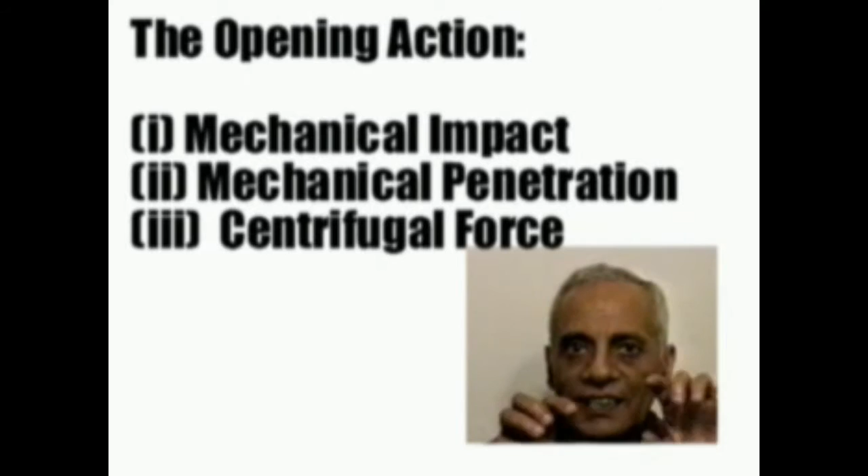The opening action in today's technology is accomplished using different mechanisms. First, mechanical impact: that is the mechanical impact through acceleration and deceleration of the fiber tufts against pin cylinders. This is very much like dusting the fibers, or beating the fibers. I can replace this term with beating action, as we classically learned to understand the opening and cleaning line. We call this mechanical impact, and the term impact here is important—beating the fibers so that any trash particles can be removed by gravity, and as you beat the fibers, you tend to separate them, divide them, and redivide them.

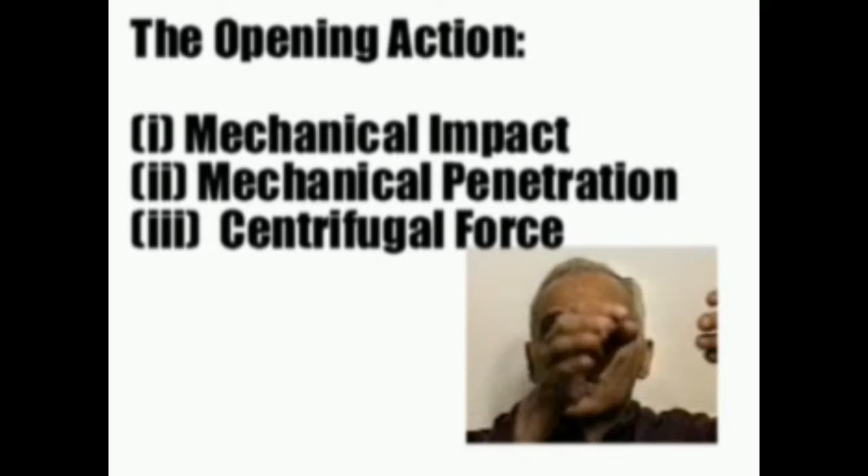Secondly, mechanical penetration through the fiber tufts. Quite often you have to penetrate through the fibers, not just dust them from outside, but penetrate for a more fine or medium type of opening and separation or dividing of tufts. Or progressive centrifugal action. Of course you can have all three mechanisms together: mechanical impact, mechanical penetration, and progressive centrifugal action. These are the basic components of an opening action, and also the basic components of cleaning action.

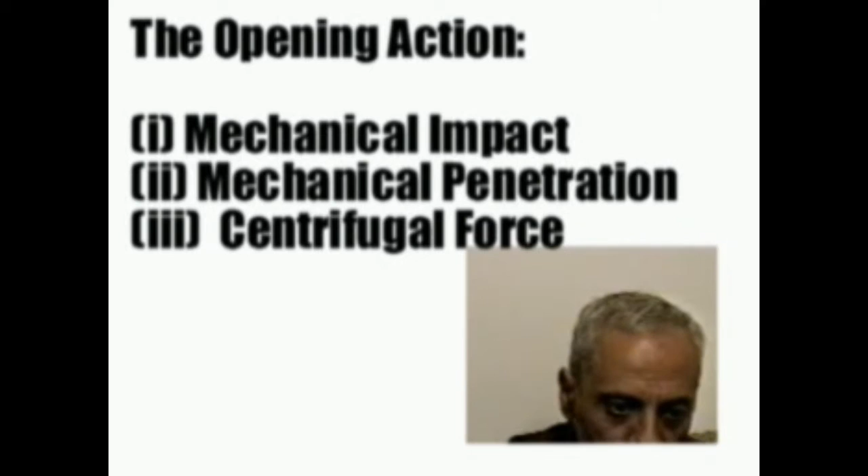Cleaning is performed through continuous extraction of the trash particles, and centrifugal force, as I mentioned, is extremely important. You have to have some form of centrifugal force to be able to dust away the trash particles.

But there are also other mechanical components that we will see shortly, such as mote knives, stripper or stripping rollers, and suction hoods to prevent trash from going back into the cotton stock.

Yes, centrifugal action would be great for initial separation, but as long as those trash particles, especially the very fine ones, are flying around the cotton, they will have a tendency to be reinserted into the fiber stock. So we need some other supporting accessories.

Mote knives, suction hoods, all of these are very useful modern tools, because in the good old fashioned approach, we relied so much on gravity, centrifugal force, and the grid bar settings under the cleaning roller for the trash fibers to go through. But now we have more accessories to allow efficient cleaning.

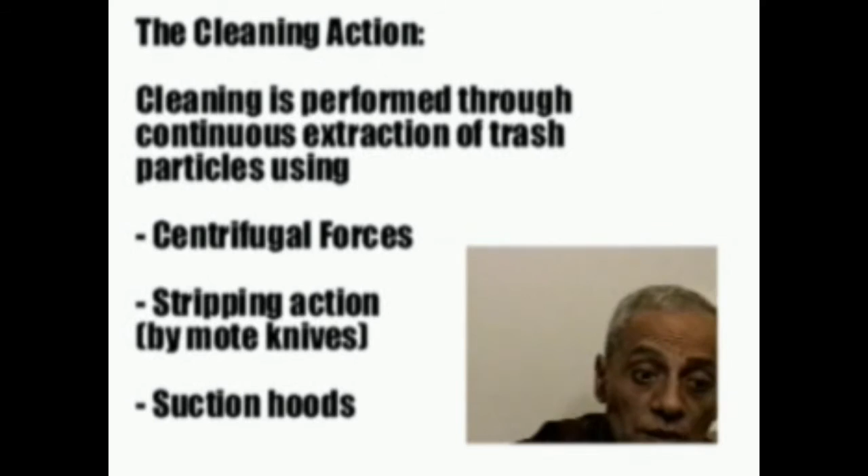In a typical opening and carding line, the tuft size is reduced by about 95%. So imagine from the fiber layer that we take out of the bale using the automatic bale opener or the classic bale opener, there is a further reduction in tuft size as you go to the end of the opening line, into the carding line.

We're shooting for 100% size reduction, the card web, but the minimum in most modern machinery is 95% reduction in tuft size, and that's by weight for those of you concerned about that. So from the first opening unit to the final opening unit, there is a reduction in tuft size that may range from 95% to 100%.

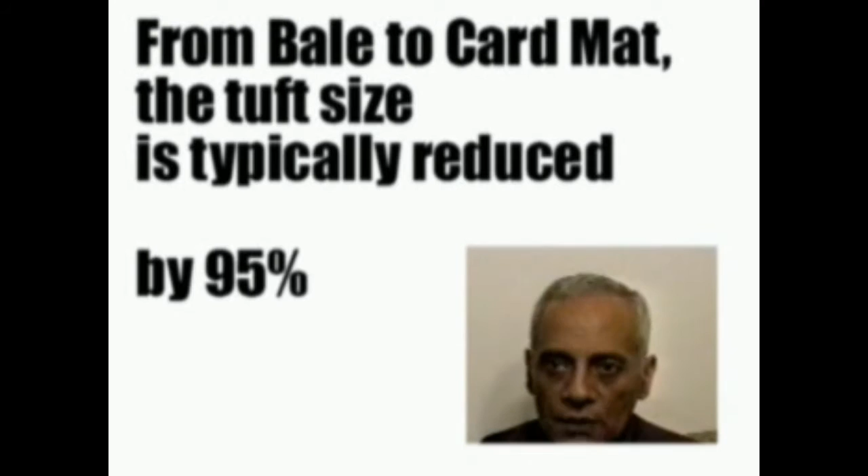When we say the final opening unit, we mean the carding process. I tend to think of carding as part of the opening and cleaning line. We separate it in our discussion because of its unique features and because it is the first strand forming process, the carded sliver, as we will discuss shortly.

As I mentioned, I cannot emphasize enough the significance of the opening action. The small tuft size is a key issue in achieving a homogeneous fiber blend. If you're doing 100% cotton, you must always evaluate your opening action.

If you're doing a mix of cottons coming from different countries, where bales are more than likely to exhibit different density, perhaps different height, perhaps different sizes, then this is a must issue: the evaluation of the openability of your process.

Yes, there are a lot of machine maker recommendations that a textile technologist can follow. But keep in mind that most machine makers perform limited experimentation in their laboratory. They are very reliable, yet they are not dealing with the same cotton or environment you're dealing with. Certainly, they try to idealize their research and experimental trials, and they give you guidelines that come from an idealized experimental setup.

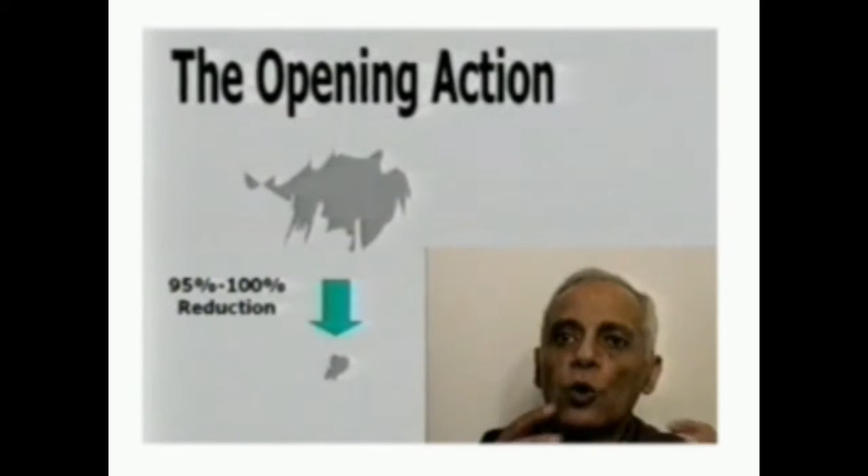You may have a very high humidity level in your operation that takes away some of that reduction. You're trying to open and divide and redivide the tufts, but the fibers are highly resistant to this opening action by virtue of the clinging power between the fibers resulting from high humidity, for example. So you have to be aware of this by continuously evaluating your opening units.

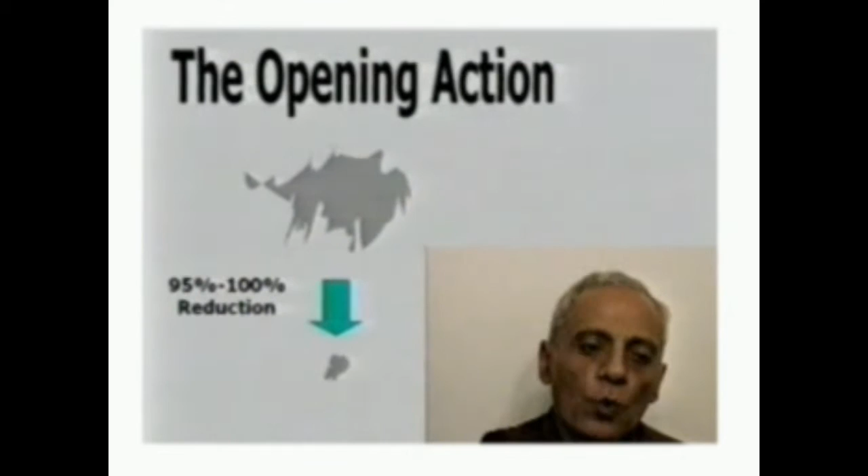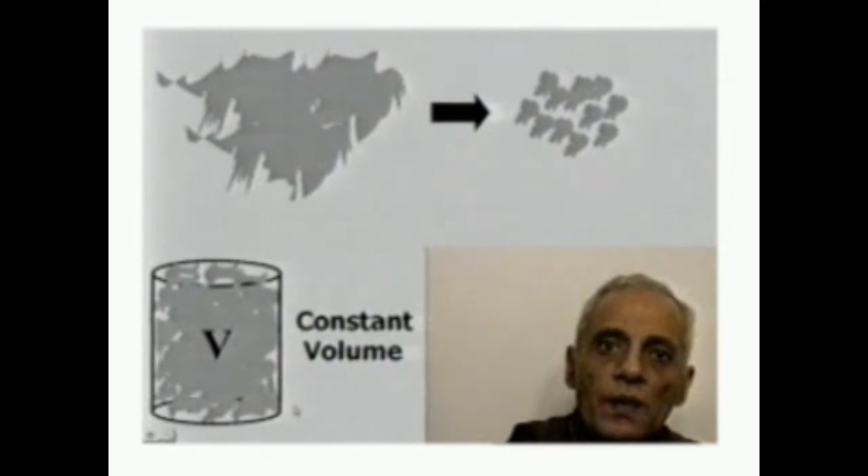The experiment is very simple. If you want to evaluate the opening unit performance or the openability, all you need is a card can of constant dimensions. The idea is we need to dump a constant volume of fiber in this can, before opening and also after opening. And the idea is to determine what I would call the opening index.

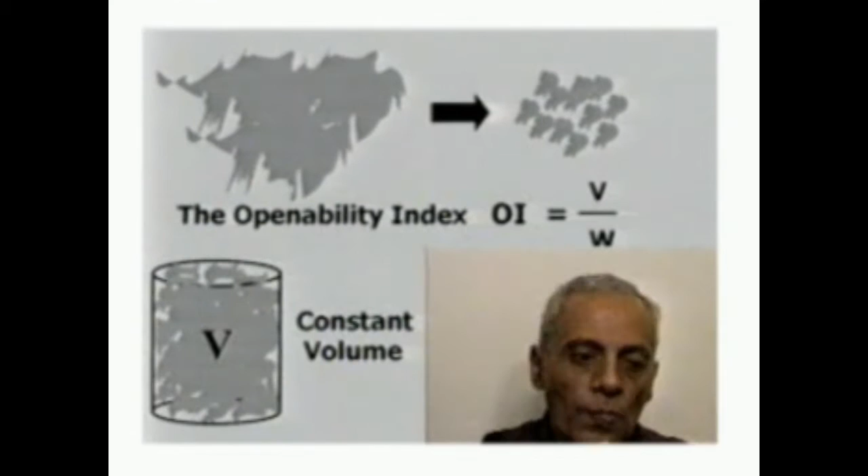The openability index is the volume divided by the weight. So with a constant volume can, you dump the fibers in. You don't want to press the fibers, you just want to put it as is, no pressure, no compacting, no pressing on the fiber layer. Just as soon as you get the fibers out of the opening unit, dump them in the can, keep dumping without much pressure. The only pressure there would be the layer's own weight. And as soon as you fill up the can, you wait.

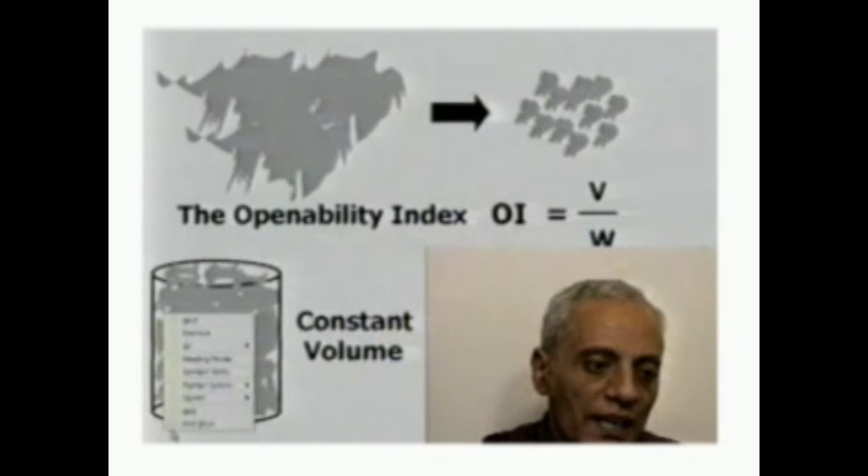Now you have the volume of the can, which is a constant, divided by the weight of the can. Obviously, a better opening unit will have a larger volume per weight, meaning a smaller tuft size.

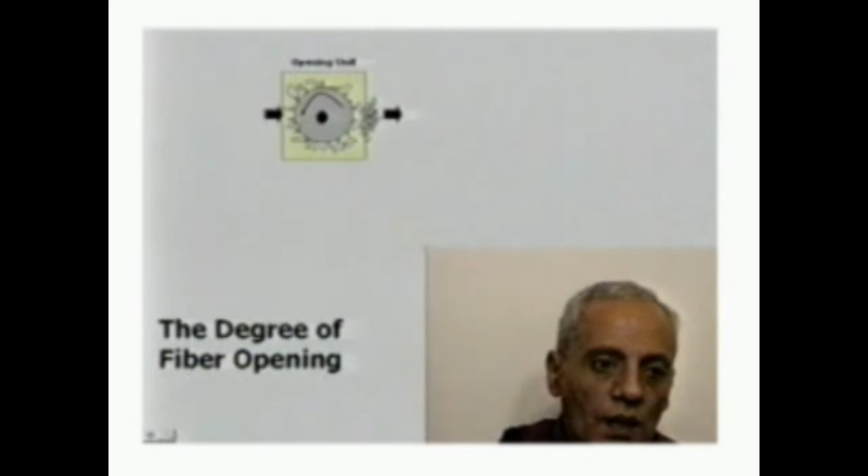Here is an example. You have an opening unit and a cylinder of constant volume, and you dump the fibers without any pressure, then weigh the can. You have the mass of the can, accounting for the empty can, and you can do that before and after opening.

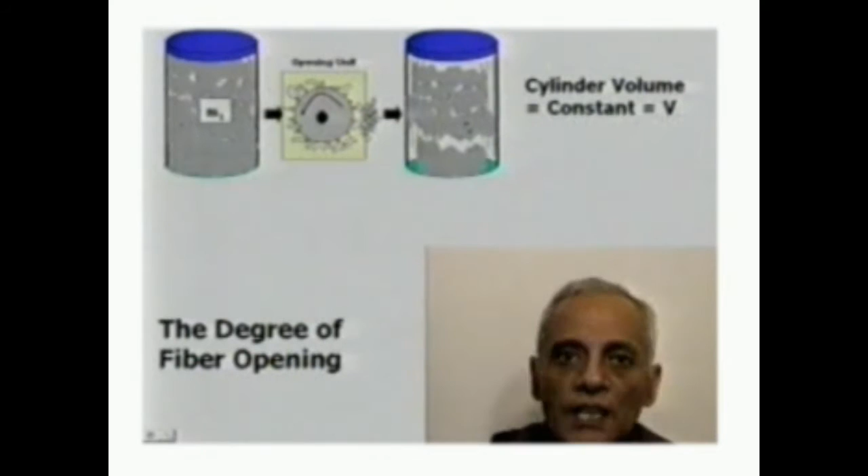As expected, before opening, the mass of fibers inside the can exhibits high density, meaning more fibers per unit volume, while after opening you have much less density. The difference between the two gives you an excellent indication of the opening index.

M1, which is the higher value, minus M2, divided by M1, times 100, will give you the so-called degree of relative opening. Why are we doing all of this?

It's because the initial opening of the process is extremely important in achieving not only a homogeneous blend, as a result of smaller tuft size and fluffiness of the cotton, but it may also reveal some problems.

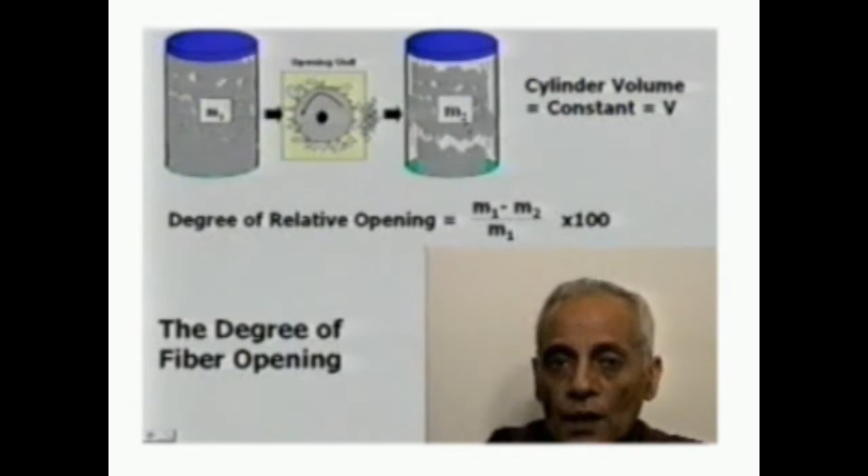As I said before, if you have high humidity in your opening and cleaning line, more than likely this will affect the opening performance of the fibers, and you can anticipate a great deal of problems down the chain of processing in carding, drawing, and spinning, which will be reflected in ends down and machine failures and stops. It's better to make such an evaluation early in the process so you can do something about it.

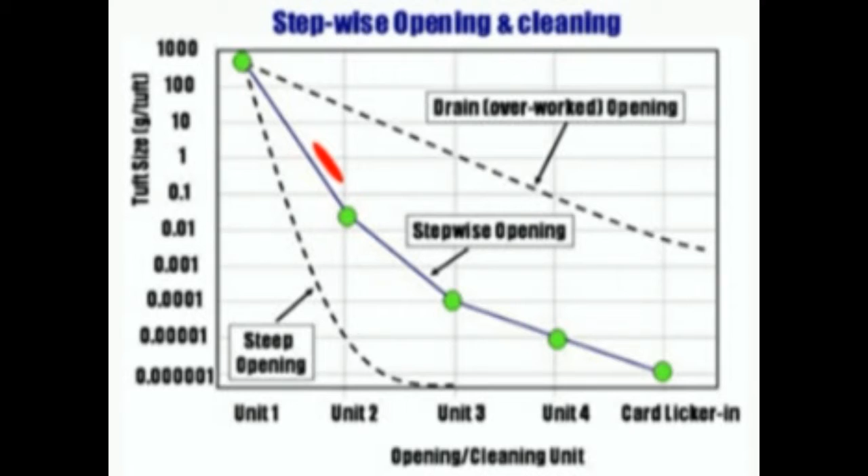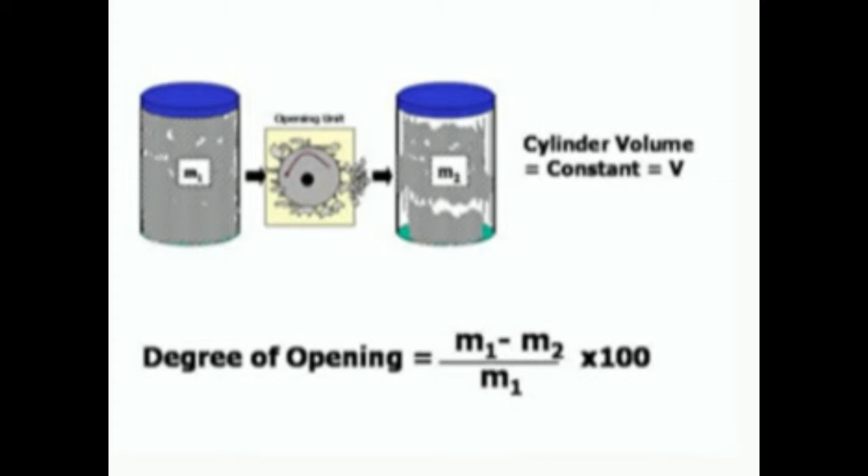This concept is directly related to what I mentioned before, the openability index or relative openability, based on the simple measure of a constant volume can where you dump the fibers in before and after. That gives you a measure of the relative openability, and a good indication of whether you are doing steep opening, drain opening, or somewhere in between. Please consider this simple experiment in your facility.

Now we move on to the other action, which is the cleaning action. As I mentioned before, both opening and cleaning are done simultaneously. As you open the fibers, as you divide the tufts and redivide them, a great deal of trash is exposed.

We also mentioned the other mechanisms, in addition to the beating: mechanical penetration and centrifugal force. So we're now about to discuss some technological tips that will allow you as a textile technologist or spinner to evaluate your cleaning action during processing.

Again, the rule of thumb is large trash are easy to remove by virtue of their weight, their gravity, and their ease of exposure, while small trash are extremely difficult to remove by virtue of their impedance into the fiber bulk.

If you crush a large trash to a very small size, it will become as small as the fibers, or even powder. If it is powder, it will totally entangle with the fibers, and the machine will be blind in segregating the trash from the fibers, so you will see those very fine trash particles all the way in the yarn and in the fabric.

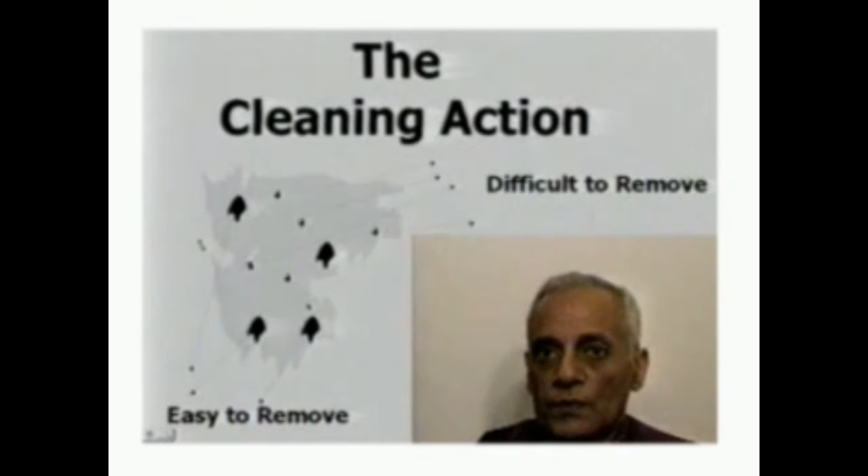So as a result, the cleaning action, just like the opening action, will have to be gradual. Why do we do an opening action in gradual fashion? Because we have to avoid fiber damage. Steep cleaning action will result in major fiber damage or excessive short fibers.

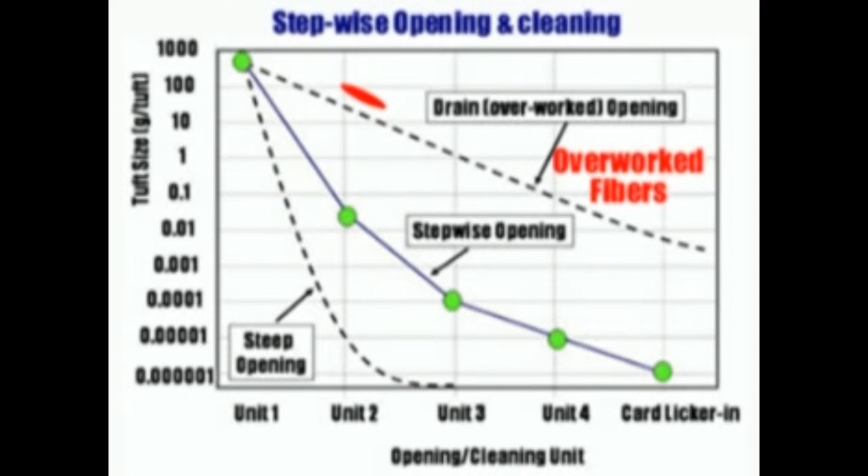We know the problem of that. An optimum opening action will result in optimum, or minimum, fiber damage, and as a result you will avoid breaking fiber.

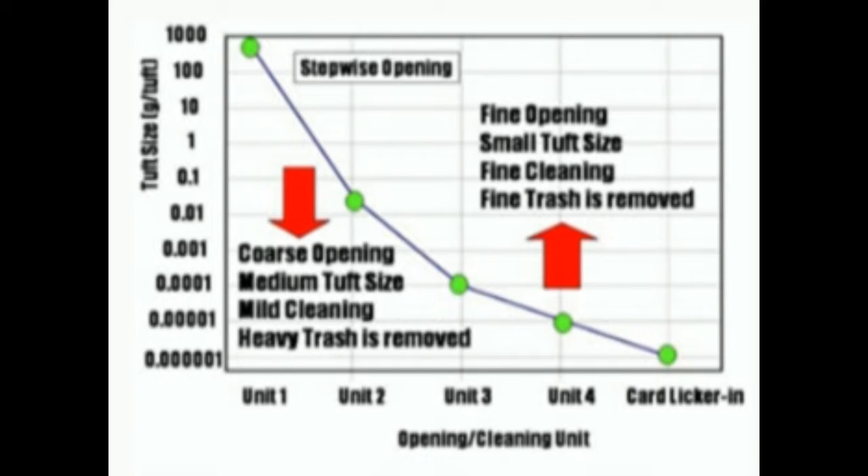The reason we have to do gradual cleaning action is very simple. We first have to get rid of the heavy, large trash particles in the early process, which are easy to remove, and more importantly, we don't want to crush them, because if we crush them into smaller trash, it would be difficult to remove those small trash later on because of the entanglement aspect I mentioned.

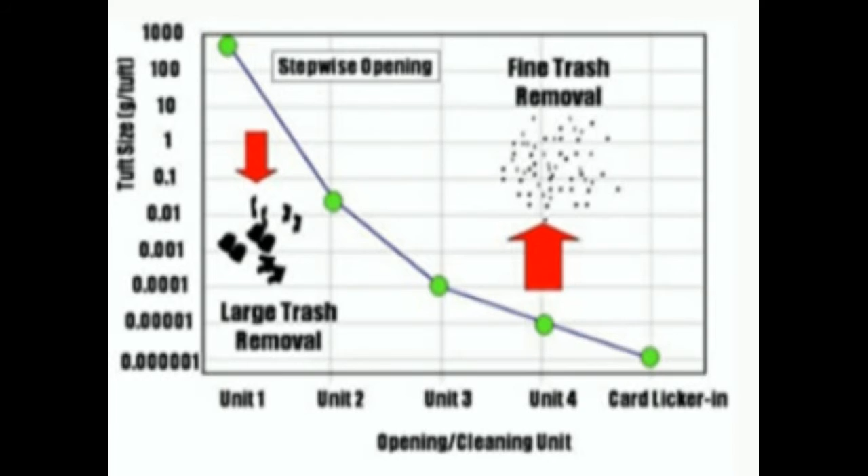As a result, we start with mild cleaning, where we remove the larger trash first, and as we break down those big tufts into smaller tufts, we'll be ready to remove the fine trash particles.

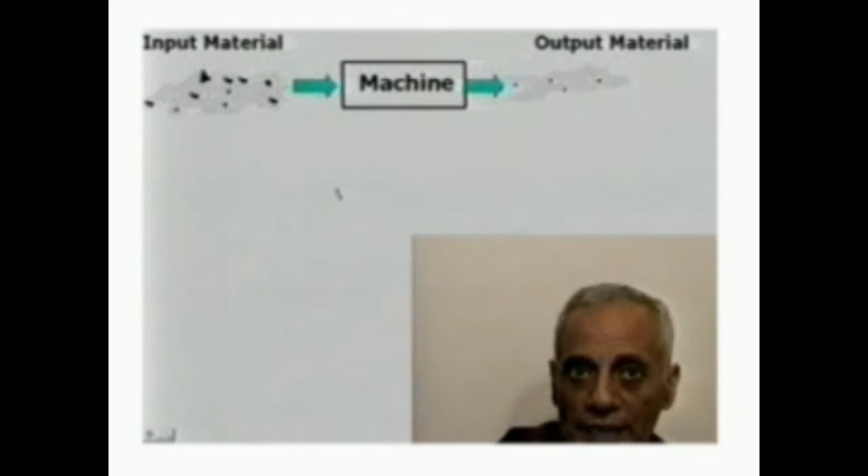How do we go about analyzing or evaluating the cleaning performance? There are standard ways to do that. Here is the input material going into a cleaning machine, and here is the output material. Obviously the input material has trash in it, and the output material will have some residual trash, since most of the trash has gone during the cleaning action.

So we have three components we have to deal with here: the input trash content, the output trash content, and the trash in the waste material.

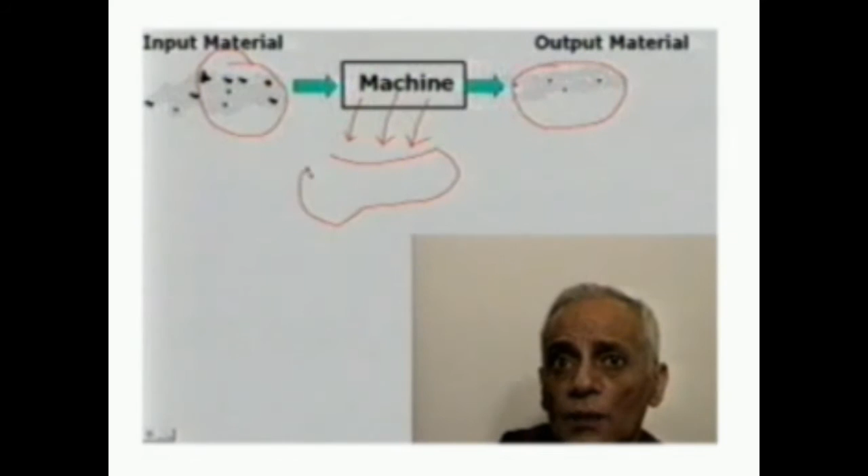Unfortunately, the waste material will have fibers in it, and it will also have trash particles. One would hope that most of the waste material will have trash. Ideally, one would hope that all waste through the cleaning unit consists of trash particles and not fibers, and if you do have fibers, one would hope they are not long, useful fibers that you could have used.

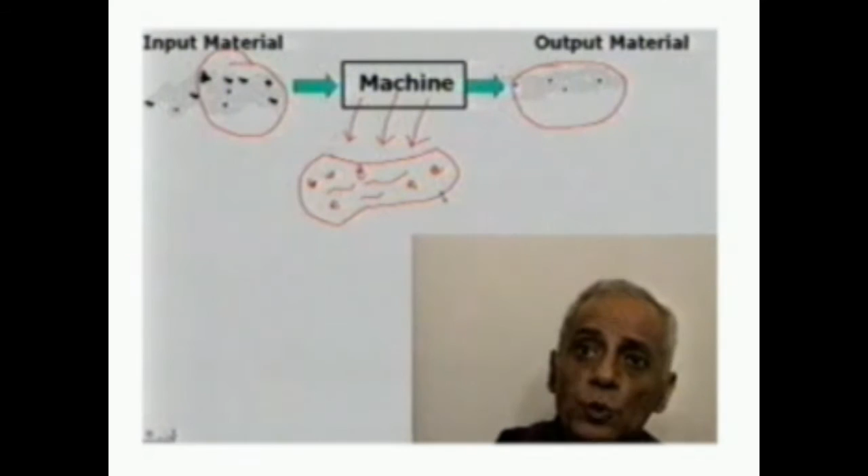Waste management: so again, we have input material with a certain trash level, output material with much less trash level as a result of the cleaning action, and waste material here that has fibers and trash.

Obviously, the existence of fibers in the waste is inevitable. As long as you're doing cleaning using mechanical means, there is no way out of that. There is no such system that would say, oops, this is fibers, we put it here, and this is trash, we put it there. There will always be a combination.

The key issue here is you need to pay attention to your waste: the type of waste, the type of fibers in the waste, the percent of trash versus fibers in the waste. These are all critical issues because they are cost-related issues that you must take care of.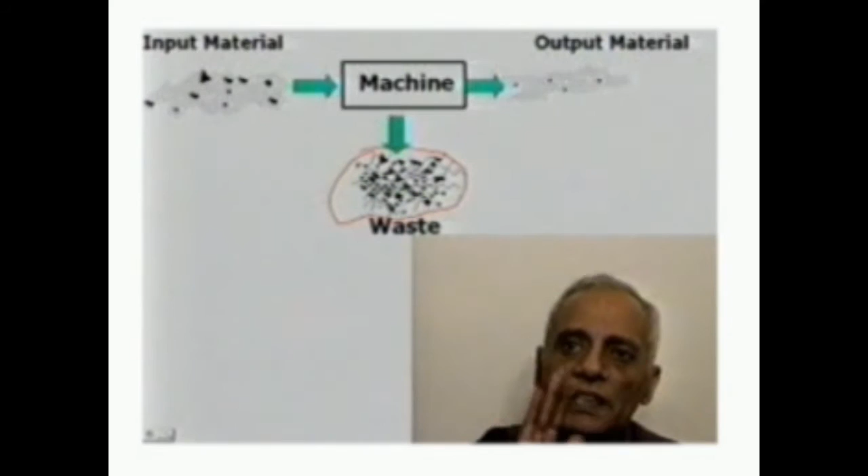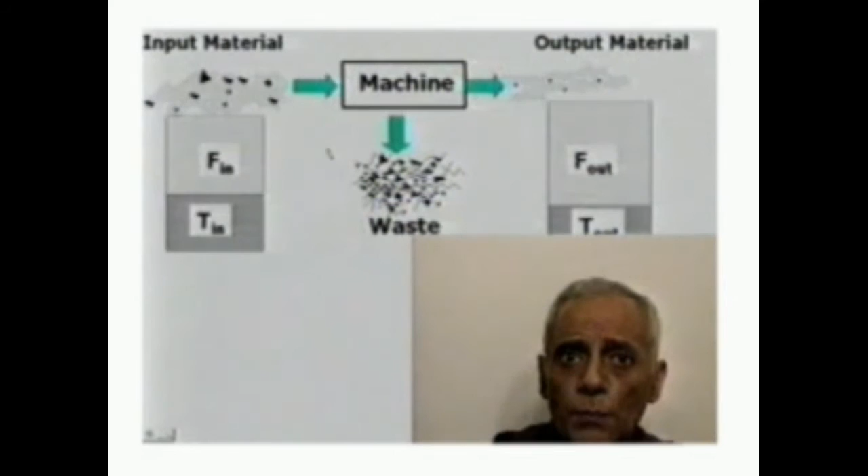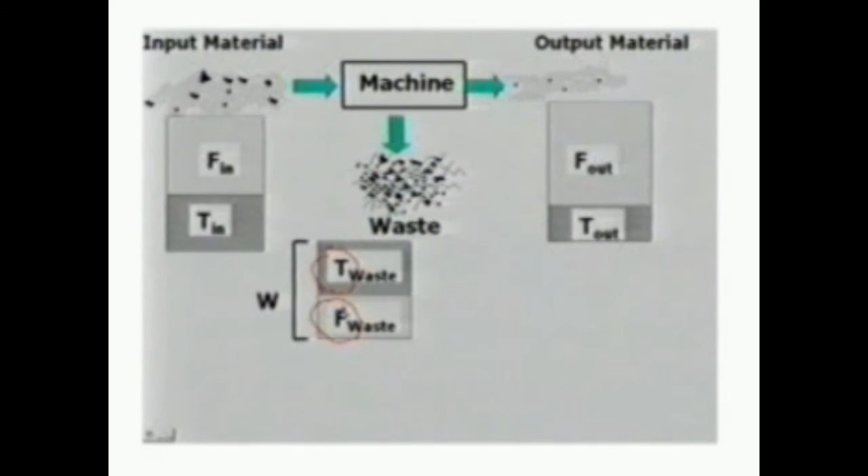Here is a very simple illustration of what we just said. Here is fiber in and trash in, which represent the total mass in. Here is fiber out and trash out, which represent the total mass going out. The waste will also consist of some fibers — hopefully a small amount — and plenty of trash. So the trash and the fiber will give us the total amount of the waste.

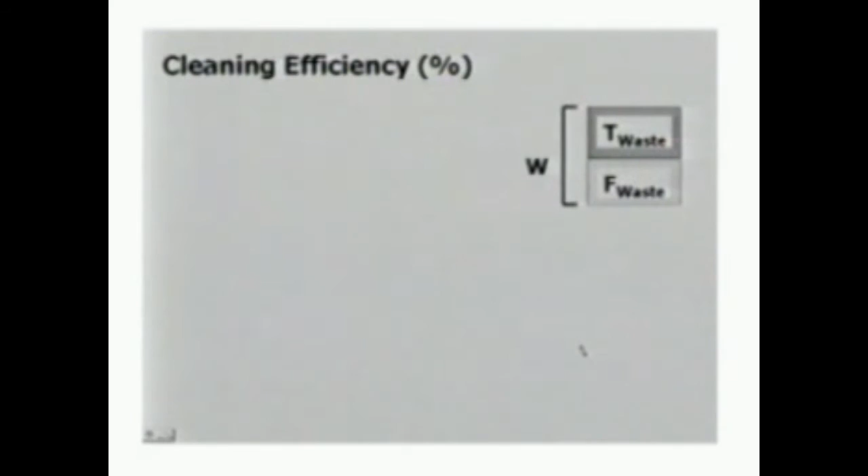In this regard, we need to introduce some important standard terminologies used to describe and characterize cleaning performance. One is the cleaning efficiency, which is an issue of waste. Efficiency here implies how much trash is in the waste, with an ideal efficiency of 100%. So the definition of cleaning efficiency is the trash in the waste divided by the total waste, times 100.

Very good. And obviously, in this case, a perfect cleaning efficiency would mean 100%.

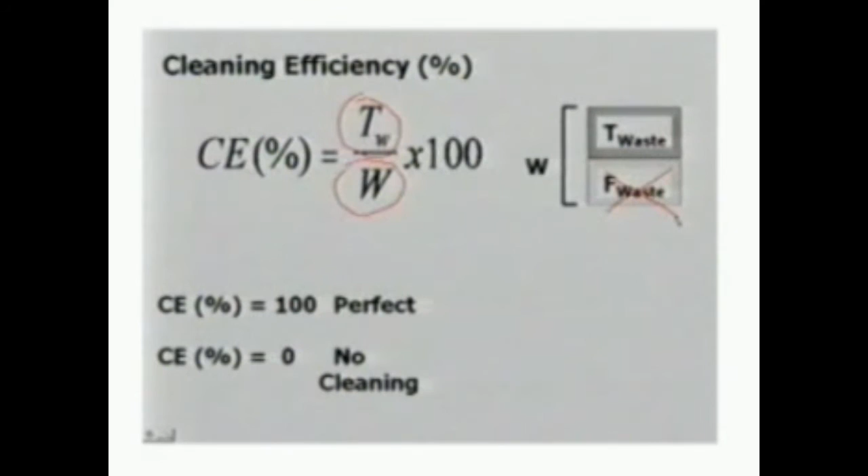100% cleaning efficiency means the trash in the waste is equal to the total waste, meaning there is no fiber in the waste. That would be great if it happened, but such a technology obviously does not exist. So you will always have some fibers in the trash, and if you're getting close to 100%, that means you have minimum fibers in the waste.

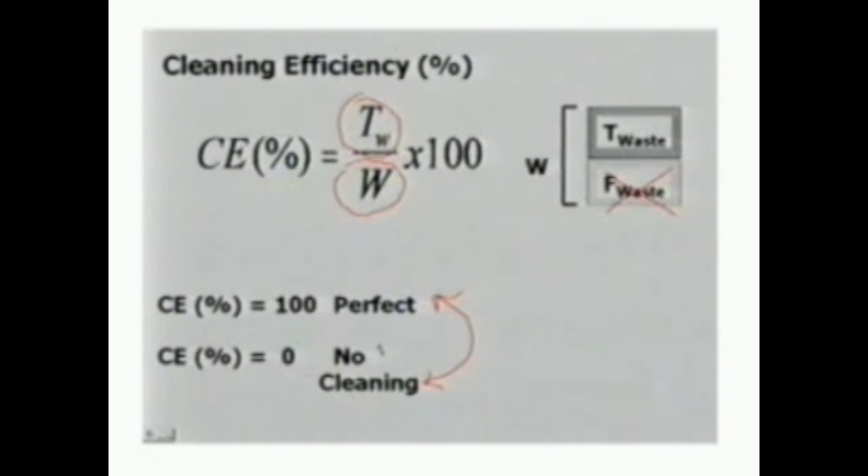The other extreme is zero cleaning efficiency, meaning zero trash, and if it is zero trash, that means all the waste is fibers, and this situation does not exist either. So this is an equation with two extreme values that typically never exist in practice. You will never have 100% cleaning efficiency, meaning waste consisting of pure trash, and you will never have zero cleaning efficiency. The value will be in between, and with modern cleaning equipment, the value should be as close as possible to the perfect 100%.

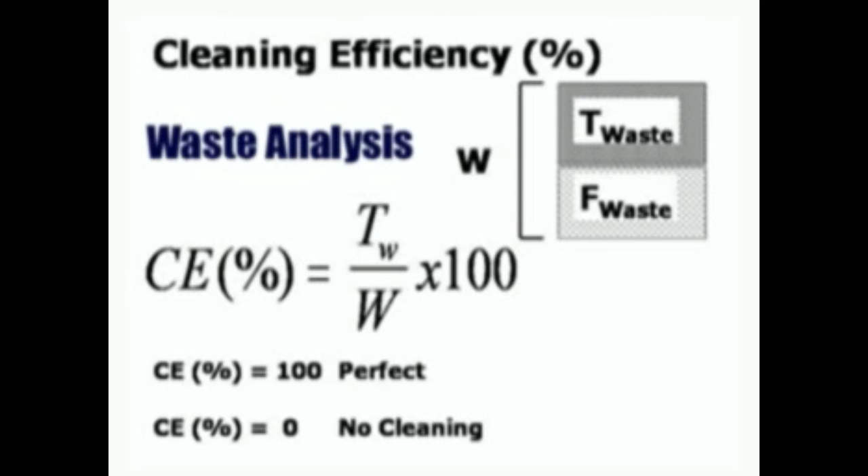Keep in mind that cleaning efficiency has to do with the waste. So if you want to analyze the cleaning efficiency, you really have to have access to the waste, and quite often this is difficult to do. In case of the opening and cleaning line, you more likely will have an access of the total waste of the entire opening and cleaning line, because it is difficult to have waste from individual units. In the good old days, we used to have waste obtained from each cleaning unit. That doesn't mean you cannot do that now, but it will involve more detailed experiment.

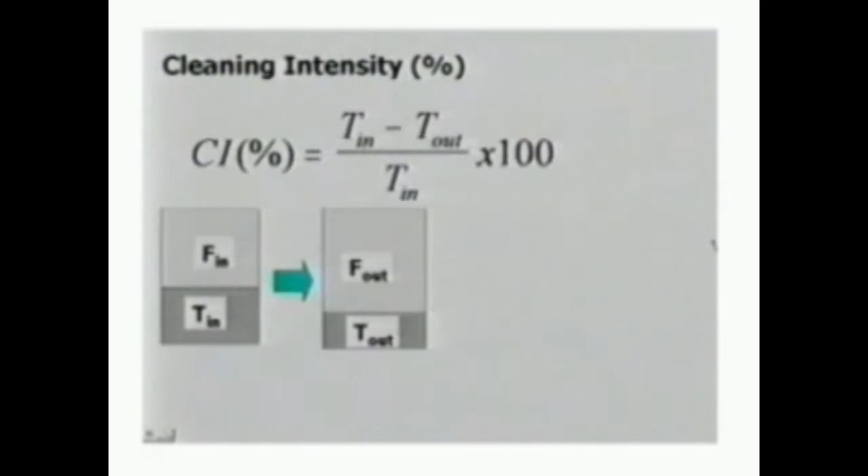The other terminology we use to characterize cleaning performance is the so-called cleaning intensity. The cleaning intensity, on the other hand, is easier to analyze because it deals with the input and output trash content. Here is our input, which will have fibers and trash. Here is our output, which will have fibers and trash. The cleaning intensity is defined by the trash input minus the trash output, divided by the trash input.

Why do we call it cleaning intensity? Let us imagine for a minute a cleaning intensity of 100. What does that mean? A cleaning intensity of 100 would be ideally great, because what does that mean? It will mean all the trash out will be equal to 0, which means what's coming out of the process will be pure, no trash whatsoever.

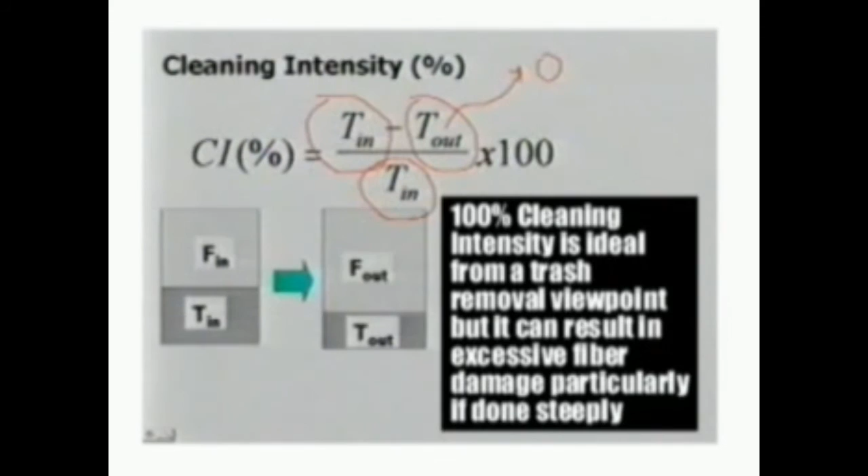This is practically impossible because, as I mentioned, in order to do cleaning we have to have mechanical action, impact, mechanical penetration, and centrifugal force. As long as you have units covered with wires, pins, or spikes, you are applying mechanical penetration through the fibers. So the only way you're going to have 0 trash out would be if you clean the heck out of the fibers, if you intensely clean the fibers, and that will not be good because you have a trade-off to make, that is fiber damage.

It is perfect, but it is unrealistic, unattainable in practice. On the other hand, a 0 cleaning intensity, meaning the trash in is equal to the trash out, means the unit did not do any cleaning, right? Because if these two are equal, that gives us a total cleaning intensity of 0, and again we will not call it a cleaning unit in this case.

So just like the cleaning efficiency that falls between two extremes that are unrealistic, the cleaning intensity also has two extremes that are unattainable, and the best you can hope for is as close to 100 cleaning intensity as possible. That is a key issue here.

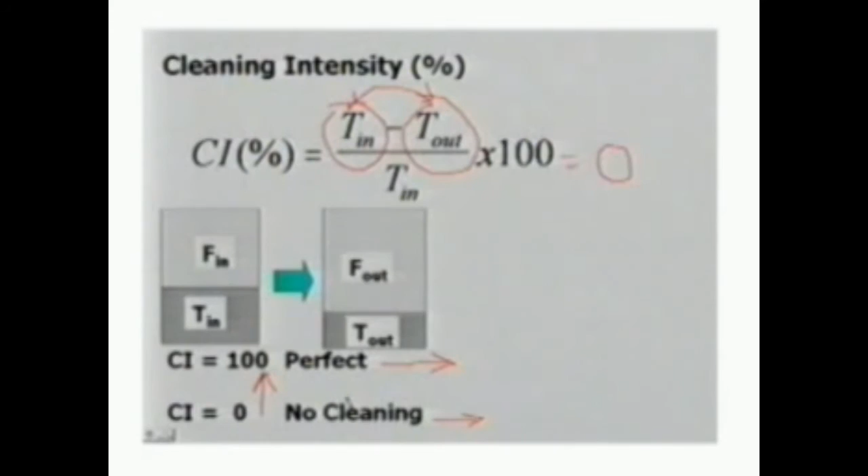Another important aspect of cleaning is the extent of fiber damage. There is a trade-off, as I mentioned. If you try to clean the fibers too much, and since we are using mechanical means to clean the fibers, then there is a great chance of damaging the fibers. Damaging the fiber may take different shapes, involving losing elasticity of the fibers, or losing some of the mechanical properties of the fiber, and that's a detailed subject. But in practice, our index of fiber damage is always short fibers. Are we breaking fibers? That is the bottom line issue here.

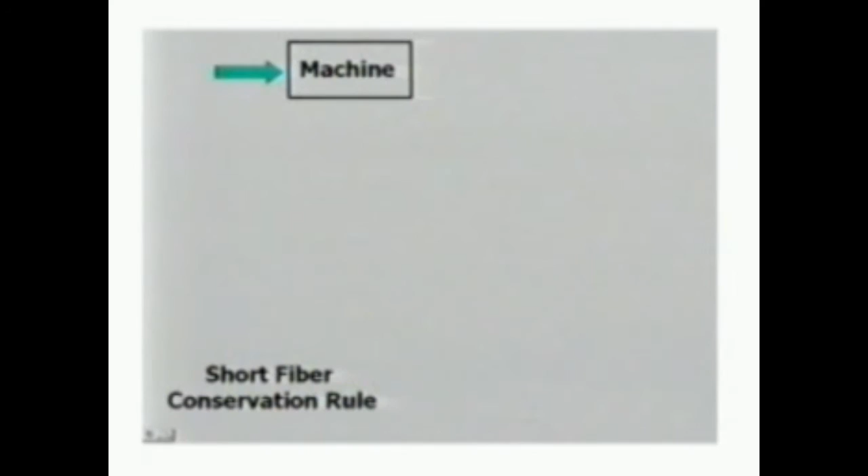So if you have a cleaning machine, typically speaking, you will have some short fiber content in. And as you remember, we define short fibers as fibers that have a length less than or equal to 0.5 inch. And obviously, as we mentioned before, fibers of a length of 0.5 or less are typically of much less use than the normal fibers.

So that is our definition, the standard definition of short fiber content. You have short fiber content in, even in the bale coming to the opening and cleaning line, as I mentioned before, and as you've seen in the clip, as a result of the lint cleaning during ginning, there is a good chance to find short fiber content that may range from 2-3% in the best case scenario all the way to 20-25% in some worst case scenarios.

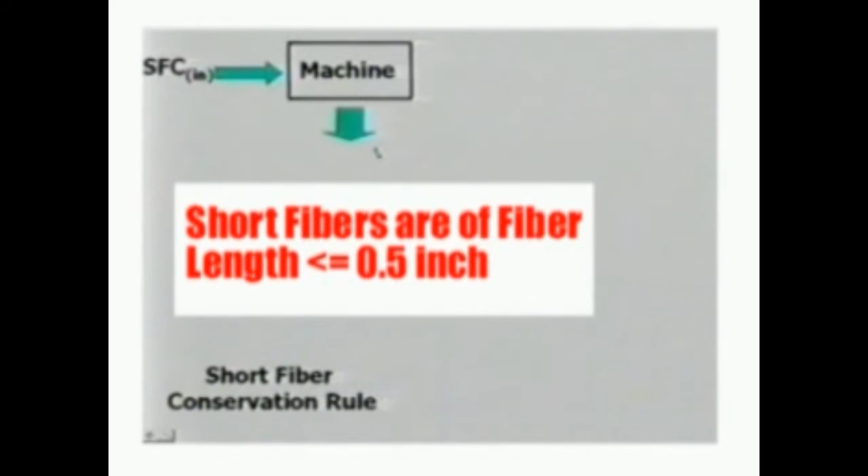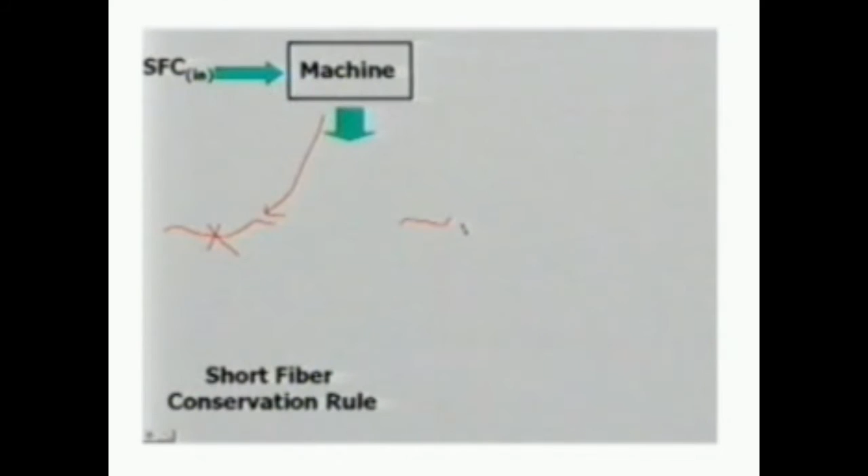So none of the machines will piece the fibers back together. The only thing these machines can do is make it worse. You feed in a fiber this way, and this machine, as a result of the mechanical action, will break the fibers. And as it breaks the fibers, the 1 inch becomes 2 halves, each of half an inch, perhaps 3 pieces.

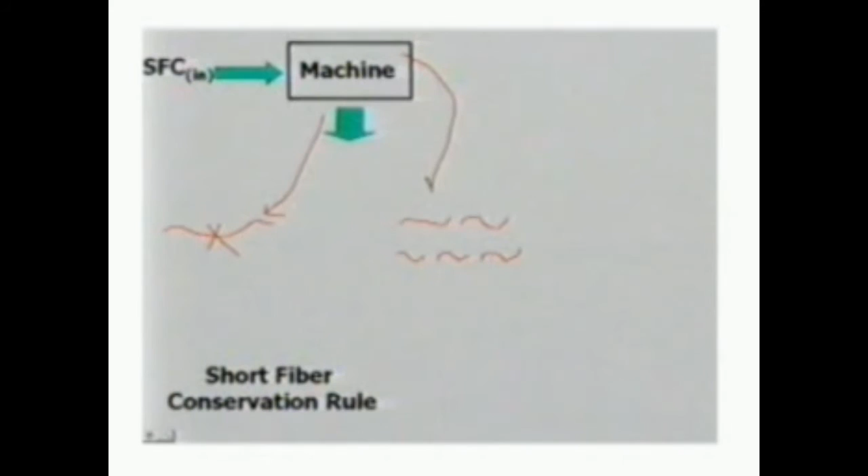And that is what you want to avoid as a result of cleaning. The only way to avoid that is by watching out for the cleaning intensity that we mentioned in the previous slide. Indeed, if you try to reach 100% cleaning intensity, you will break a long fiber like this into small pieces, and those small pieces will be absolutely useless in yarn quality or down the stream of processing. So you want to avoid all of that.

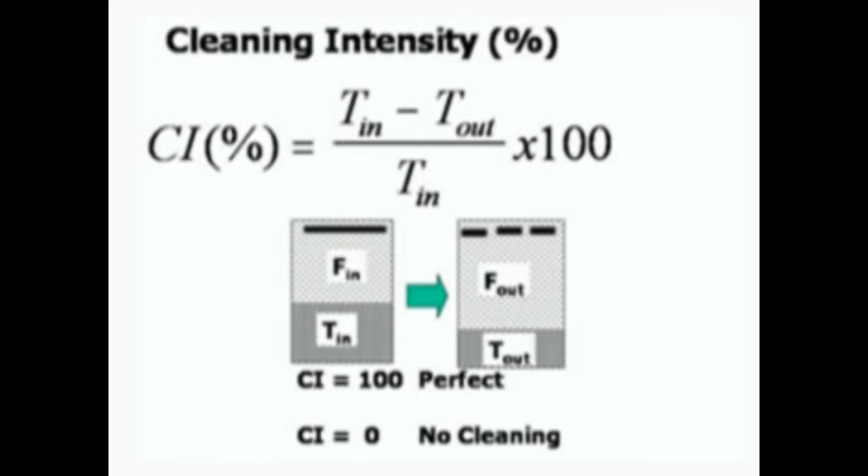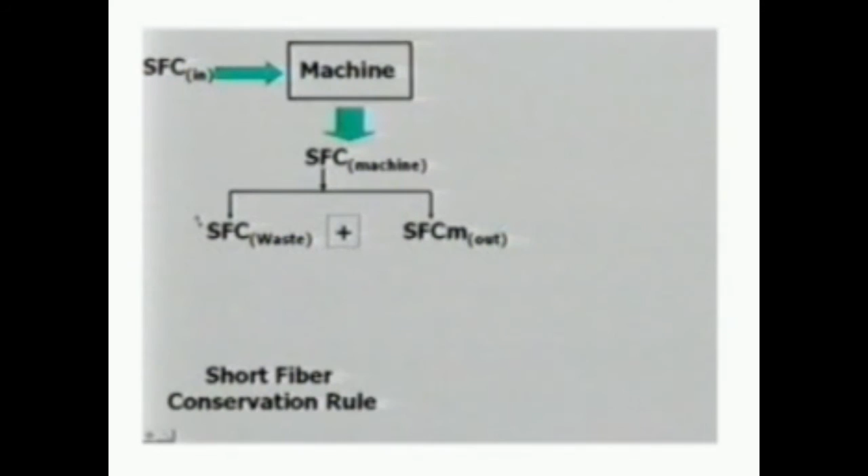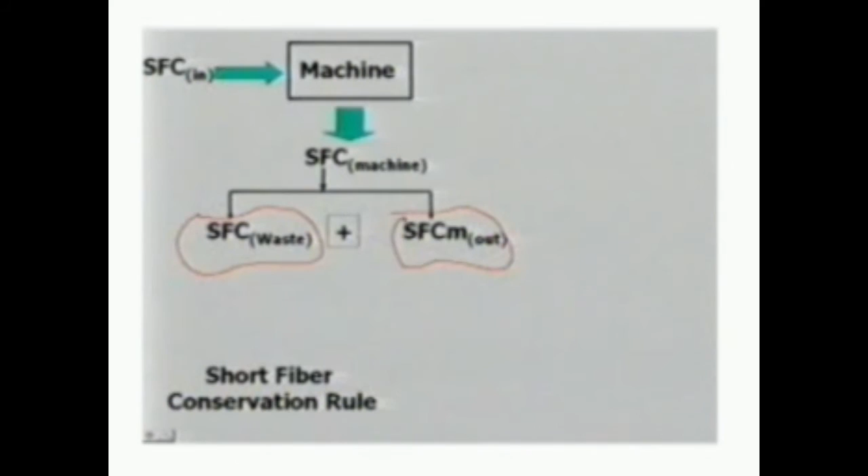So as a result, we can measure the short fiber content in, and here is short fiber content created by the machine, which are typically the short fiber content waste, because we have waste which will have fibers, as we mentioned before, and some of those fibers will be short. We would hope that most of them are short, but we will also have short fiber content out, that is going out on the other side of the machine.

That is what I call the short fiber conservation rule. That means you have short fiber in and short fiber out. The short fiber out will be equal to the short fiber in, because nothing is going to happen to the short fiber in unless they are removed via waste, plus the short fiber created by the machine. So more than likely, short fiber content out will always be greater than short fiber in, unless a great deal of those short fibers were dumped in the waste, as we can see here. So you have to be aware of all of this.

One way to calculate the extent of damage is to think a little bit about the short fiber content out, because the short fiber content out may be a highly variable parameter. Depending on how much short fibers went to the waste, the short fiber content out may be either greater than the short fiber content in, if minimum short fibers went to waste, or in some cases they may be less. But being less does not mean the machine did not break fibers. It simply means some of those short fibers went into the waste.

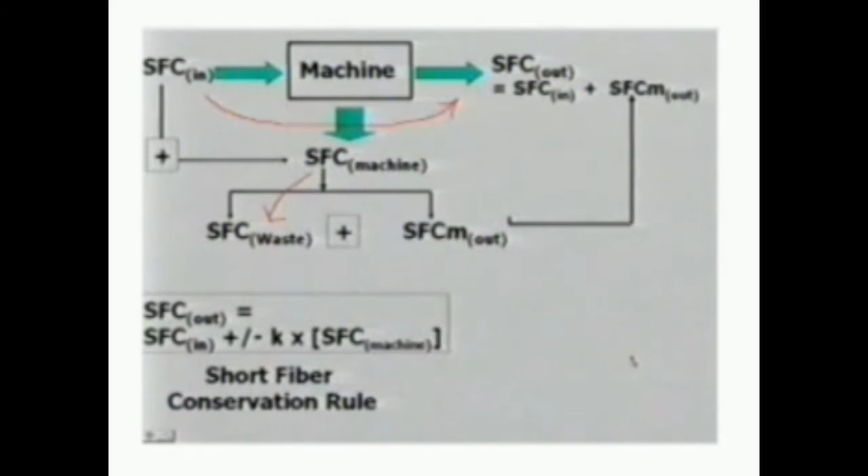So we have to account for that, and that's really what this formula is saying: the short fiber content out is equal to the short fiber content in, plus or minus some factor times the short fiber content created by the machine, and that factor will depend on whether some of those short fibers went to the waste or purely went with the output.

That leads us to a very important term I introduced in a paper years ago, which I called the extent of fiber damage. The extent of fiber damage, if you want to know how much damage is created by your machine - cleaning machine or opening machine, since both can break fibers - is defined by the short fiber content out minus the short fiber content in, divided by the short fiber content in.

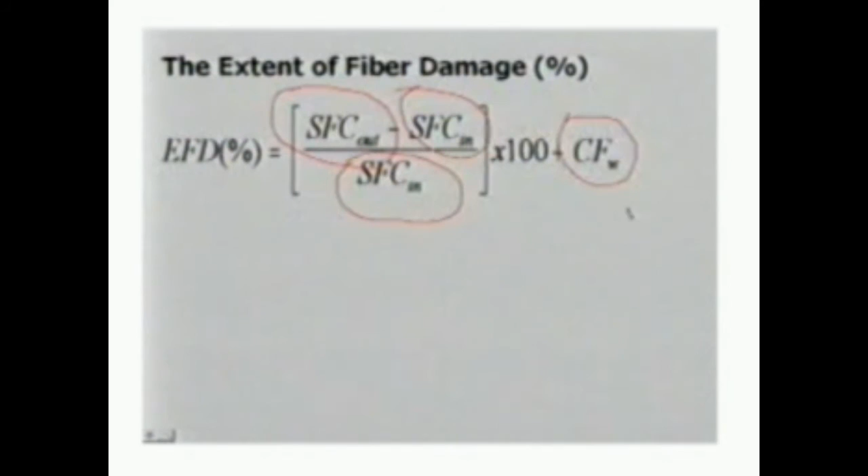Now this definition here is an oversimplification, because as I said, the short fiber content out may indeed be less than the short fiber content in. By virtue of what? By virtue of the short fiber that went into the waste. As a result, we had to add a correction factor to determine a more reliable extent of fiber damage. So here we have the short fiber content correction factor equal to the percent waste - the total waste of your machine - times the short fiber content in the waste minus the short fiber content out, divided by the short fiber content in.

So if you account for this index here, you can indeed measure a more reliable extent of fiber damage. Obviously, just like the cleaning efficiency we mentioned before, this requires analysis of the waste fibers.

You can either take waste from the entire opening and cleaning line, or if you have the luxury of taking waste from different units, then that will be a more accurate approach to do it.

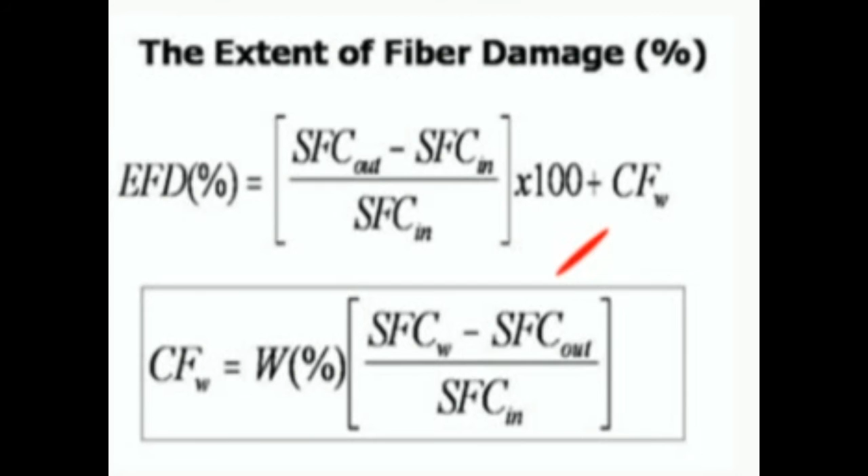Here are some examples. Machine A: short fiber content in is 10%, short fiber content out is 12%. This machine has 5% waste. Now as we analyze this waste using perhaps the Shirley analyzer or the AFIS system, we find that in this waste we have 60% trash and 40% short fibers. If the trash amount is 60%, that is automatically the cleaning efficiency of this machine.

That's an ideal situation because you're definitely going to have some long fibers as well. Now we have a short fiber content in the waste of 40%, so we can apply the extent of fiber damage equation with the correction. First, it is the short fiber content out, the 12%, minus the short fiber content in, the 10%, divided by the short fiber content in. This gives us 20%.

But by adding the correction factor, which is the total waste percent, the 5%, times the percent of short fibers in the waste, minus the short fiber content out, divided by the short fiber content in, that gives us the actual extent of damage. That's 34%. If we ignore the correction factor, we only get 20% extent damage, which is really a way underestimation of the true damage created by the machine. So one of the merits of using the correction factor is to give us a more reliable index of the extent of damage by the machine.

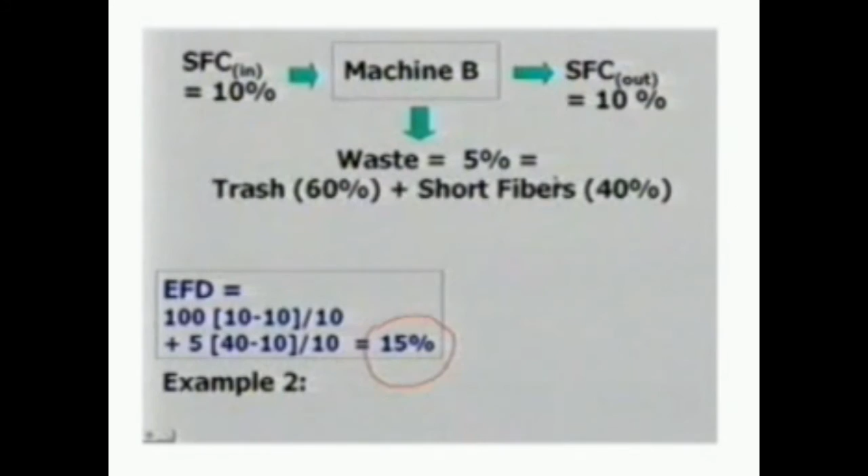We move on now to another characteristic that one has to consider in evaluating the opening and cleaning performance. That is the so-called nep removal efficiency.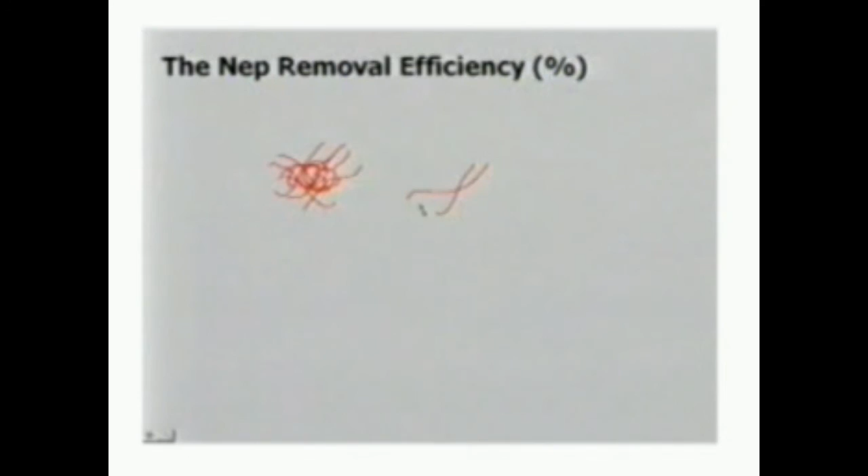Now neps, as we mentioned in previous sessions, are a bunch of fibers. Here they are. Those fibers are now going to be entangled together, forming a ball. And you can imagine having too many of these formed during the opening and cleaning action.

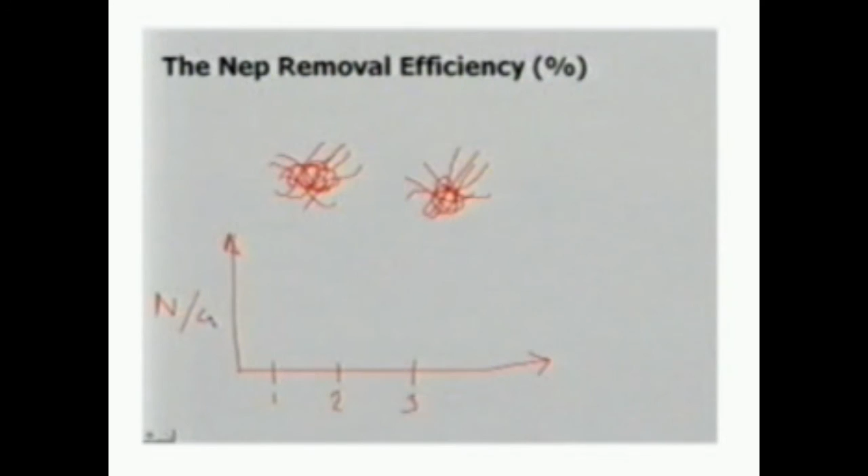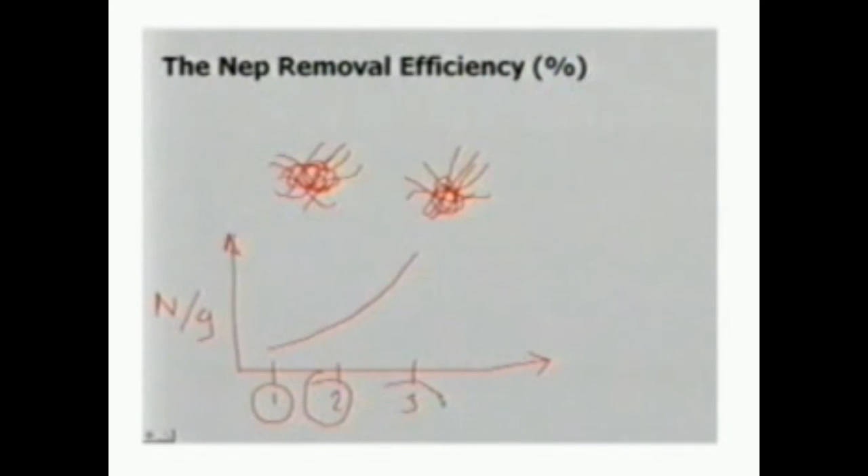Indeed, it is inevitable. If you try to profile the opening and cleaning line, suppose this is unit 1, this is unit 2, this is unit 3, and so on, and this is the neps. Suppose we're talking about nep count, or neps per gram, then it is inevitable for any opening and cleaning line, no matter how modern or optimized, that the neps will increase as you go from one unit to the other. Every time you do cleaning and opening, you're more than likely going to form neps, as you can see here. So please keep that in mind.

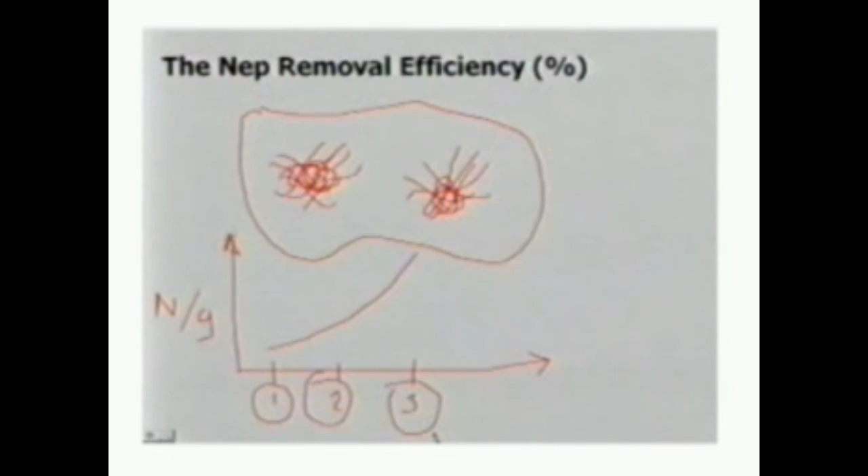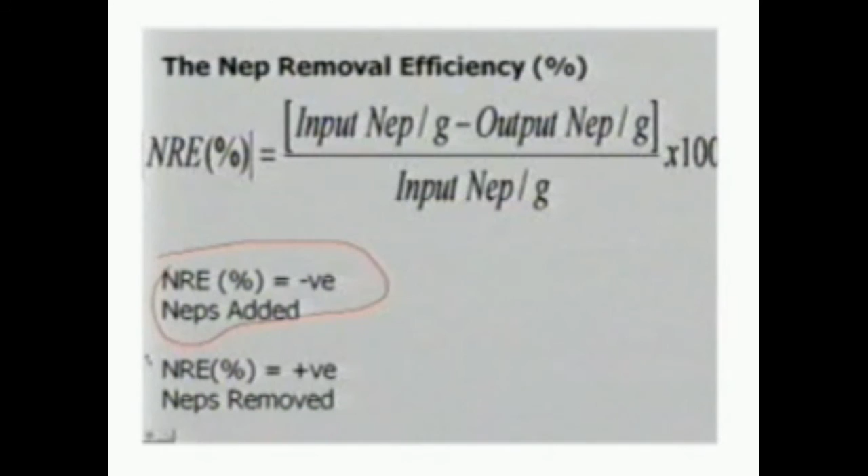As a result, it's very important that we talk about the nep change. I call it here nep removal because it's commonly called the nep removal efficiency, and it's better used for the carding machine since they remove neps, as we will see later on. The definition of nep removal efficiency is simple: it is the input neps per gram minus the output neps per gram, divided by the input neps per gram. Now, if the machine adds neps, then the nep removal efficiency will be a negative value. If the machine removes neps, then the nep removal efficiency will be a positive value.

We see this in the opening and cleaning line. So this is what you're going to see in the opening and cleaning line, while we see this in the carding unit.